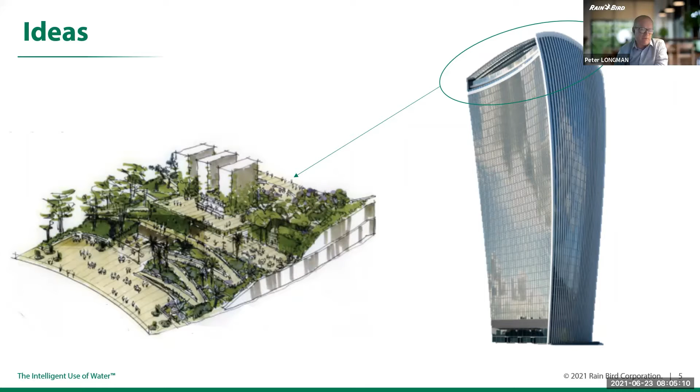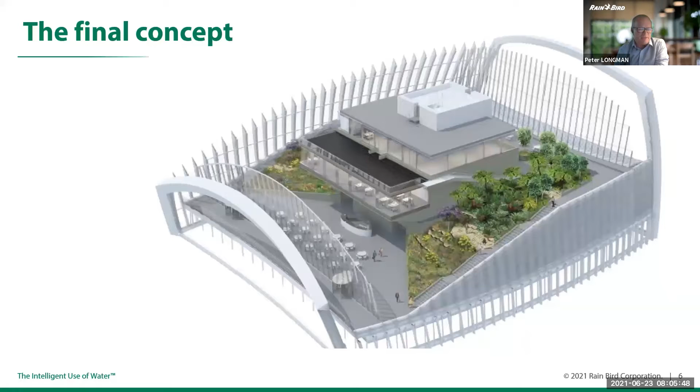So then the concept was put together. This was the final concept, this is the top of that building. The idea was to have two bars and restaurants and space in the middle of the garden, then 2 flanking gardens at each side with planting and materials. It was commissioned, Willerby Landscapes put the landscape contracting together, and Waterscapes were chosen to do the irrigation. It was going to be a complex task.

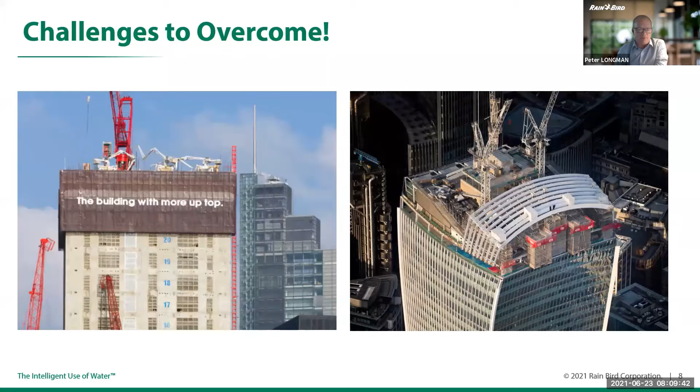You've got 400 tons of soil on the top of the building, with water being irrigated with plants, and that building's worth 1.3 billion pounds. So it's got to be robust, and it's got to be right.

The bottom of the building - this building was replacing an existing one - and the idea to have a garden at the top, they wanted to maximize the space. So the top is bigger than the bottom in almost every facet, all the way around it's bigger. But that meant that it's concave.

Just as an interesting side note, this picture here is taken from the ground. There were times of the day when that sunlight was beating on the building, and you could fry eggs, as some journalists did on the ground next to it.

Anyway, back to the Sky Garden. So this is one flank - hopefully you can remember from the design, this is the right-hand side if we picture it from the front. The idea was to have a garden with trees from the Mediterranean and South Africa here, from the top to the bottom, and it has to be irrigated.

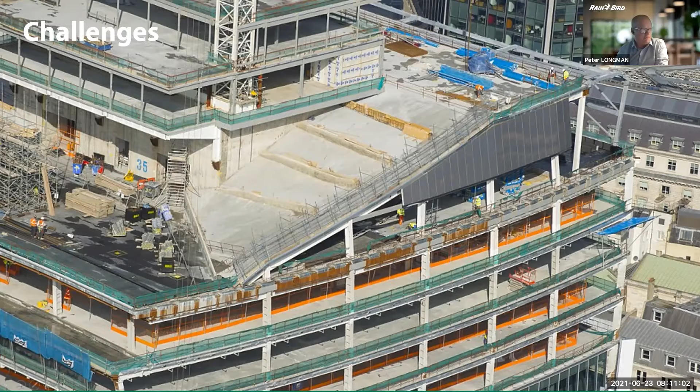This is where they were going to put it, and of course this alone presents its own challenges. You've got a spot here where the soil could subside, so you have to prepare for that. You also couldn't just put all your irrigation in one system, because you want to be able to control different zones differently - the bottom front of the area gets more solar radiation than the top, for example.

So this is how it was planned. You can see the central area with the restaurants and so on, and then each side, left and right, was split into 4 different zones each, so each zone could be controlled independently for different planting reasons. At the top, zone 5 and zone 1 for example, that's where the bigger trees were, and zones 8 and 4 were where the smaller succulent plants would be housed.

Peter, when you're talking about zones, we would call that maybe hydro zones - different watering requirements. Does that mean they actually chose different irrigation material, or did they blanket the irrigation but just know they're going to water each zone differently? Can you elaborate a little bit?

Yes, I can. It's 100% exclusively drip technology, so there's no rotors here in the ground. They do have a misting system as well - that takes care of the ferns, and then the drip irrigation takes care of the rest. When I say drip irrigation, we're using drip line and also XB emitters, so for certain areas, for certain things, they're using XB emitters. What they also did here is some of the grey areas are sitting areas, so you can see they've broken up the landscape going down - that's another way of blocking each area independently.

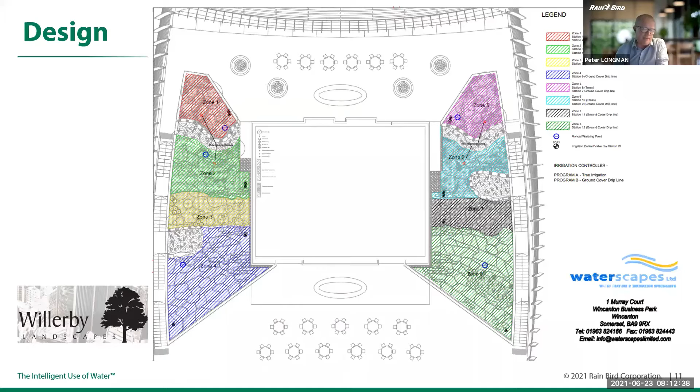Well, Peter, it looks like I'm cutting to the chase here, but it looks like you have to be pretty organized, not just from a logistics standpoint, but also from an installation standpoint on this.

Yes, I think just to mention some of those plants, going back - some of those plants are over 100 years old when they were installed, so they were taken from places and put in. They were lifted in, which we'll come back to, and some new bedding plants and things like that too. But some interesting things, yes, going back to the installation.

This is Waterscapes' installation, and they were chosen for their ability to work in the city on tight schedules, but also their attention to detail in the plant room and getting the water up to the plant room, which is up on the 35th floor. All the water had to be taken up, and there's a holding tank on the 35th floor. The attention to detail and excellence was key, because it's important for robustness, but they wanted it to be reliable for many years to come. Attention to detail here saves a lot of time afterwards.

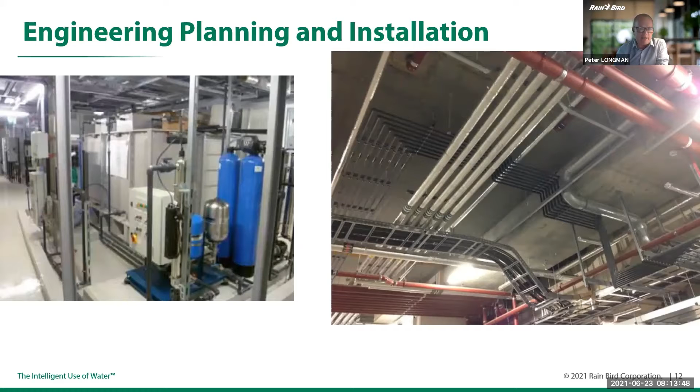Into the detail, I think these few pictures tell the story themselves. Moving things around for the installation, and going back to the interesting poll questions, getting stuff up to the roof was really challenging.

Let's talk about the soil first. There's 400 tons of lightweight soil up on the top, delivered just in time through the evening. It was all done in nine weeks. Every bag was taken in through the service lift and up the service elevator, and then specially designed equipment was used to distribute the soil on the top. Then it was manually finally placed. The trees were lifted up the side of the building, over the top, and then down through the skylight, picked up and put in place by the engineer. So the logistics of getting the equipment to the skyscraper and then getting it in was very, very challenging.

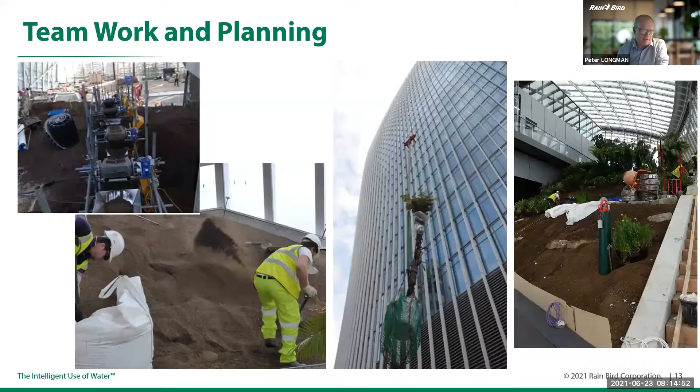Was there, sorry, I keep interrupting you, but I'm so curious. Being on top of a building with water and plants, was there a lot of consideration with what central control or control system you put up there? Did they install soil moisture sensors and flow sensors? What measures did they take to make sure we didn't flood this massive building from the top down?

Yeah, so they have a controller that can run all 12 stations independently or simultaneously, so when they're irrigating at night they can put them all on if they want. But they don't have moisture sensors in here. What they do have is a maintenance team that's there every day, managing the whole planting area and the equipment. They're there every day watching the moisture, really hands-on, checking each area. It's kind of delicate, really. I think it's like a greenhouse up there in some senses, so they do a lot of that by touch and feel, looking at the plants and seeing where they need extra moisture. They do that manually.

I guess if you have 100-year-old plants, you're going to have top-notch horticulturists up there. That's right, they're babysat, those plants, I think.

It's impressive seeing a giant palm being lifted up the side 38 stories, actually higher to get it to the sky roof, and planted in there. That would have been something to see in downtown London, bringing some palm trees for once, and then bringing it up the side of the building.

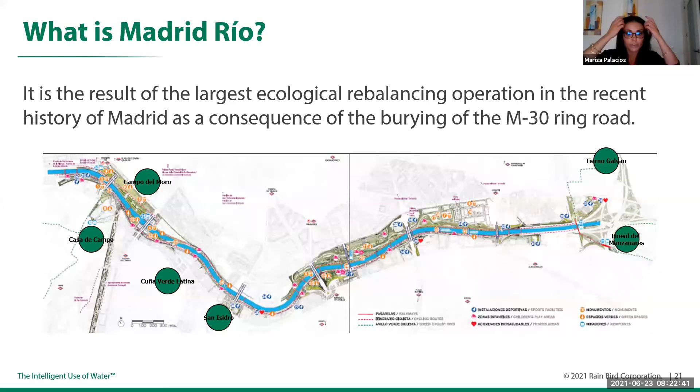Moreover, you see here 6 green spots - this park is also connecting these 6 green areas, defined in our country as green lands for the city. The mindset in our country and in Portugal about water saving and quality of life is very strong, more and more, because we don't have as high an amount of rain and water as in Central and North Europe. So this is the introduction to this interesting project.

I thought this might be a good time to ask a poll question to the audience, Marisa. I'm curious what people value most from incorporating green space back into the city - noise cancellation and reduction, people wellness in the form of wanting to be outside and providing a lower stress atmosphere, traffic still existing but not as in the forefront, or the river life and enjoying the water. Take a brief moment to answer this question.

Marisa and Juan, you both live in Madrid, I assume you were here before and after the project - but what is it like before and after along this 11 kilometers? Is it many more people? Are people more social? What do you see personally?

It's hard to reply because it's a completely different area. Can you imagine an 11-kilometer park where you can walk, have a drink, children can play, you can go with your bicycle, people can run, there is family time? Sometimes there are also concerts, there are new buildings. It's a transformation so important that it's hard to say - it's all about wellness, quality of life, fresh air. It's like a small new city within this big city. We have 6 million inhabitants in Madrid. That's impressive.

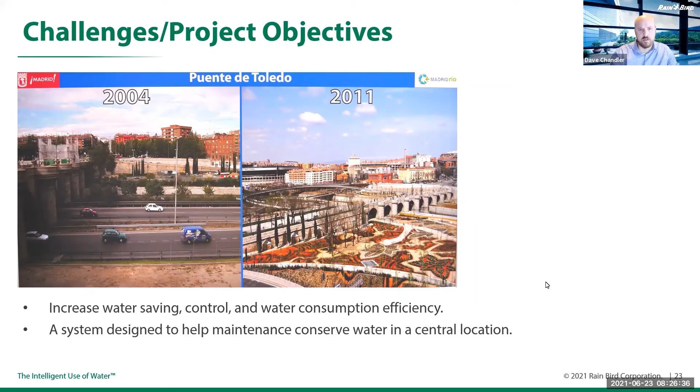Very nice, okay, thank you, Marisa. Good morning. First, I apologize for my poor level of English, but I have the help of Marisa and Dave and Mauricio.

The solution chosen to overcome the different challenges of this project was the IQ system with the following configuration: we used 9 ESP-LXD controllers for decoders, installed throughout the whole park in different sites, to integrate more than 700 valves.

Currently, the number of valves is more than 800, because we have integrated isolated areas without cable, using a 9-volt TBOS system in the IQ.

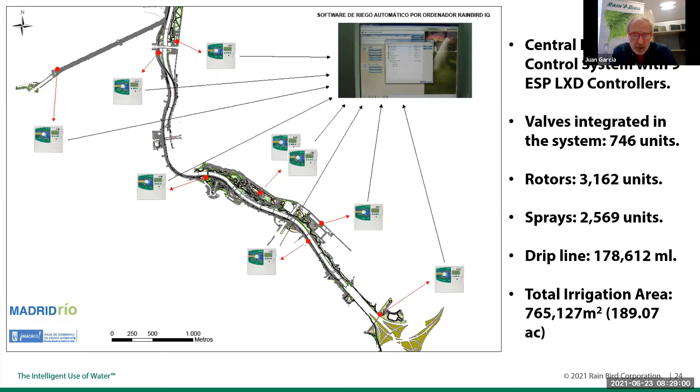What was the real challenge? The real challenge was the situation of the irrigation network after finishing the landscape works, because in this scenario we needed single control over a job performed by more than 50 companies, with multiple coordination problems.

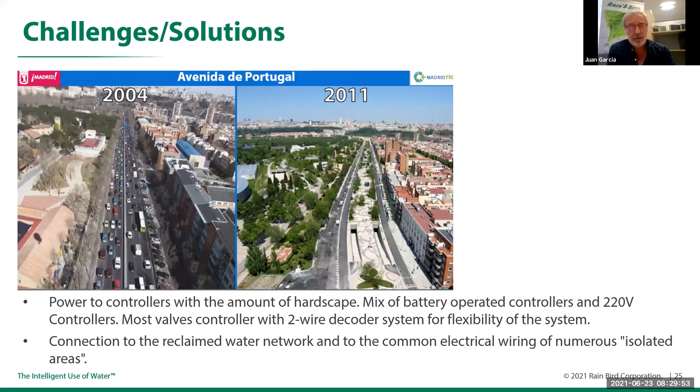When you have a big area, you have contractor companies that, for example, need to connect valves, but connecting this valve to the controller is work done by another company.

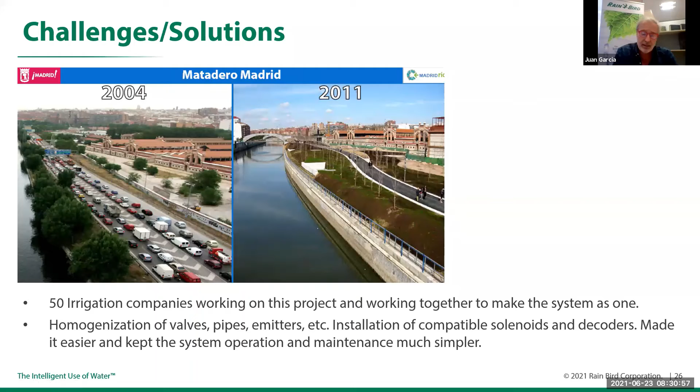The management, installation, and engineering management was the opposite situation to the project presented by Peter—essentially the opposite situation. It was necessary to harmonize valves, solenoids, to repair cable networks and wire to isolated areas. Really, it was chaos for the conservation company when the work finished.

In this picture, we see the end of Portugal Avenue with a typical concrete system from Portugal that was integrated into the design of the park, because of the avenue's name, Portugal. The designer worked with a typical Portuguese pavement, and it's a classic picture because Portuguese specialists built this area.

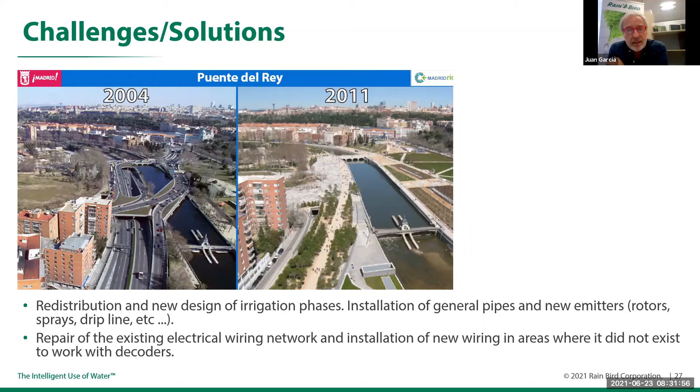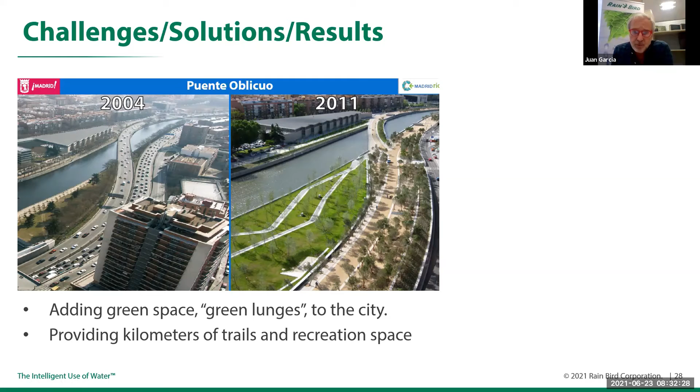And what is the result? The result is a large green axis that connects six other large green areas of the city, as Marisa has resolved—this important result: kilometers of trails and recreation space for the citizens of Madrid. This is one of the parts most visited by the citizens of Madrid.

For me, this park connects two areas of the city that were separated by a large highway border. In the past, with the two lines of the M30 highway separating them, the M30 was a big border, and now the solution is very important for the citizens of Madrid.

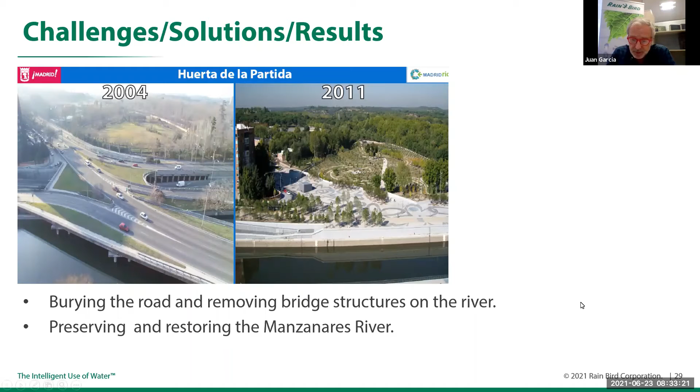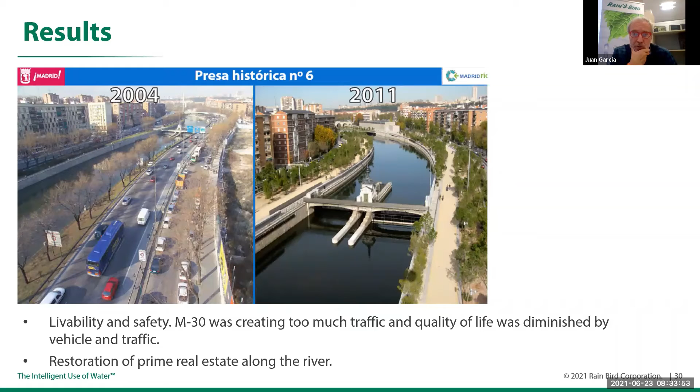The properties have been reevaluated, all the nearby properties, and for me this park represents the victory of green infrastructure over motor vehicles. The citizens near the Madrid Río Park are now new citizens in Madrid. Okay, thank you.

It's the areas near the Manzanares River, and it's one of the most visited sites of this park.

Juan, Marisa, thank you very much. I think Brittany and I can both say we want to come on a tour and have you guys take us around the park and show us some of this rich culture and this beautiful system that came out of this. Like previously with Peter, we did get some questions in.

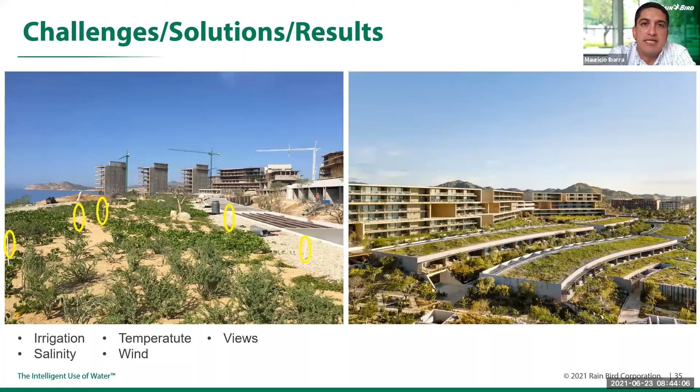Modify it, that's a good point. Before, when the resort opened in 2018, early 2019 and 2020, they are requesting all the hotel developments to start treating water on their own, because prices are going up for the use of potable water. Before that, they used potable water for pools, for hotel rooms, for all the development. So now they're doing that modification. But for this specific project, we didn't use any non-potable, it was all potable.

Thank you. You're welcome. We also have a lot of slopes from the point of connection where we have the pumps. We have more than 60, 70 meters of downgrade to the beach side. As you can see in the images from left to right, there's like a 60, 65 degree inclination. We used a retention mat to retain the soil from running off to the hardscape, and we did subsurface irrigation again, installed through the retention mat.

We see some installation details. Let's go back one. We use a lot of pressure regulators, online and on the valve. On the picture on the very right, we have a large capacity disc filter, a 2-inch PSV valve, and 2 inline pressure regulators just to downgrade to the drip irrigation systems.

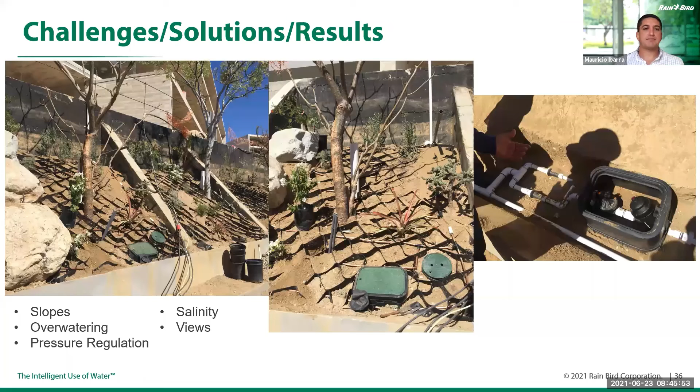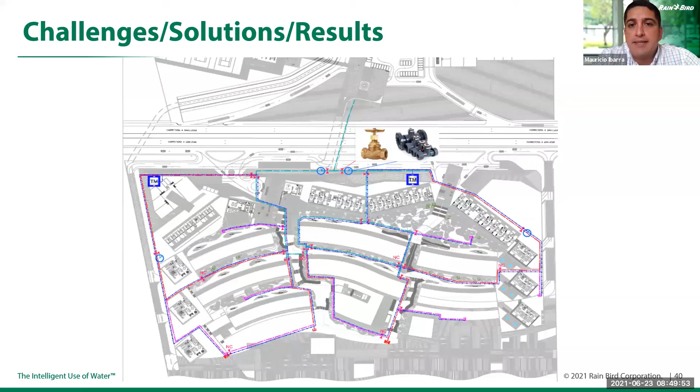So obviously what he's paying for, what he traveled for. Yeah, that's beautiful. Mauricio, thank you very much.